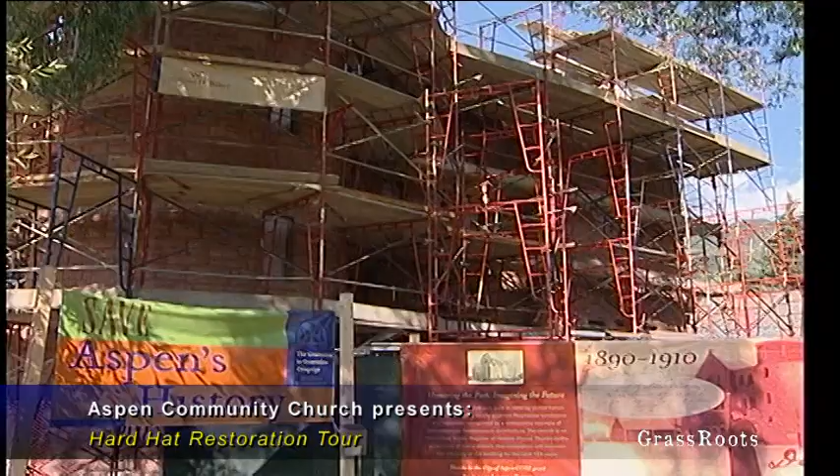Let me go into some of the challenges of its original construction. All the material, all of the masonry, was pulled out of the Frying Pan up someplace around Ruedi. It's all called Peachblow. In the 1880s, there was a railroad spur that went up the Frying Pan. So all the material was quarried; it was rough in shape.

All the material was hand stacked into horse-drawn wagons, and the wagons were pulled to the railway spur and loaded by hand onto cars. Then they were pulled down the Frying Pan and up the Roaring Fork. I think it was on Dean Street that the railway would stop. They would then hand load the material back onto a horse-drawn cart and pull it over to the church. All of the material was shaped by hand here.

We know this because all of the pointing material, the pattern called grapevine, was tinted with all of the powdered material generated from shaping all of the stone.

So we calculated the weight of the building. We assumed, and I verified, that the foundation goes down about 6 feet, and we know the wall thickness. So we did some calculations, some of the masons and I, and we figured that the building weighs 1,500 to 1,800 tons. That's the quantity of material that was moved out of the Frying Pan.

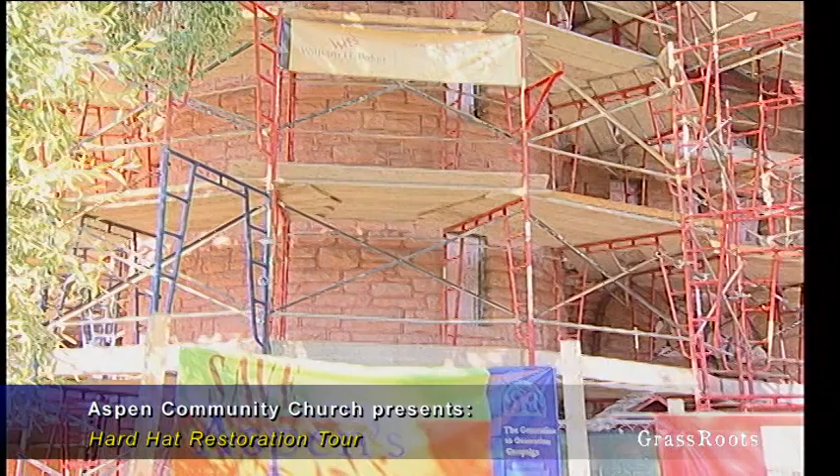You'll see the greatest care was given to the south face and to the west face of the building. So the masons, when they started constructing this, they would gather stones that were misshapen and create all these flat edges. All these stones were irregular, and you'll see that they all have this rectilinear shape. All of that was created here.

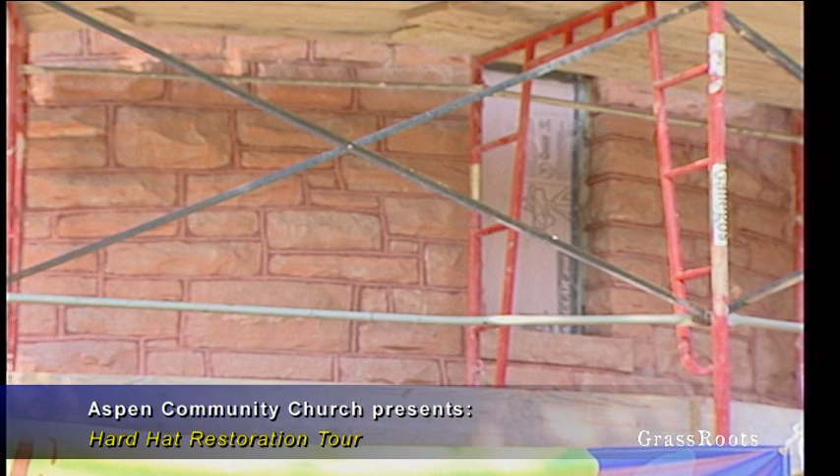The wall is 18, 20 inches thick in general terms. It consists of this very attractive outside facade, and an interior that, in general, their goal was to make flat, so they could plaster the interior.

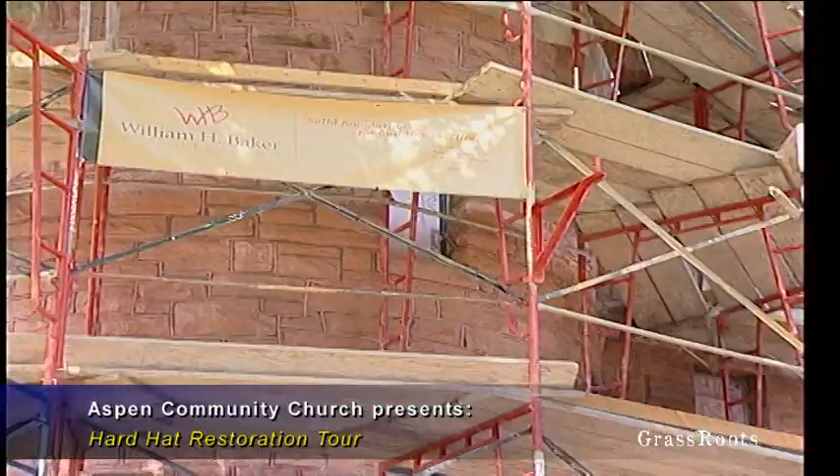The section between, the 6 or 7 inches between - so if I could describe an 18-inch wall, it would be a 6-inch exterior that's very attractive, appearing as what we see here, and then a rectilinear flat face on the inside, and all the rubble and trash went into the middle. That's how the building was generally constructed.

Tremendous care in terms of carving and detail work was offered on the south side and the west side. I'll take you around here shortly and we'll look at the other sides. Not nearly as much care was given on the other sides. They had the A-teams on these two sides and they really came out nice, and it's a little bit looser on the other sides.

The tooling that we see is called grapevine. I have the lead foreman from Gallegos, Steve Lavin, who was responsible for all of this. Steve and I did the Christ Episcopal Church four or five years ago together, and so all the work that I'm involved with, he's involved with in general terms.

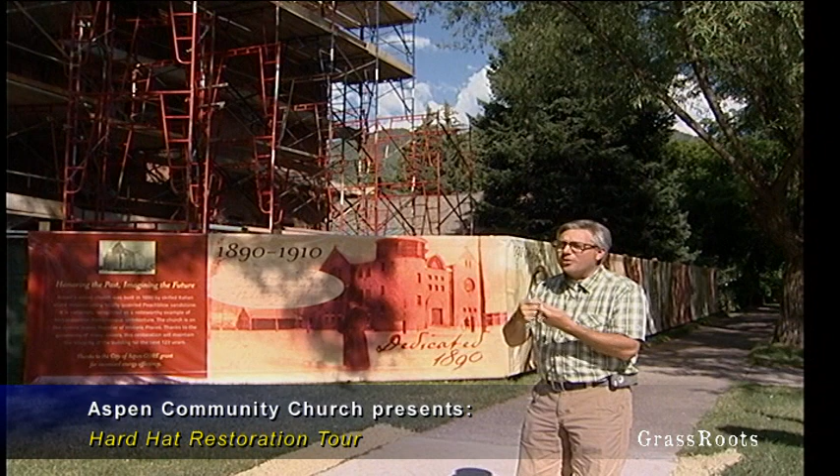Steve found original parts of the original pointing. We found sheltered pieces that were in good shape. Steve had tools made that were the same shape as the original pointing. We were able to find the interior, which is called the lens, the interior of the material. It was purplish and brown on the outside, all the pointing before we redid it. It had been exposed for 120 years to the elements and so on, and it was really unattractive. But if you snapped it, you could see the original color where it hadn't been exposed to the elements, and that was this salmony color.

Steve explained to me when we first started this project that all the material was shaped here in general. They salvaged all the powder, and when it came time to do the pointing, they mixed that and did all of this. So Steve had created tools that were the original profile and shape of the original tooling, and then we took the color and had it sampled in a lab, and had it reproduced in this historical context, meaning that the strength of it would work well with this sandstone.

If you use new materials between these stones, there's no give, and the mortar is stronger than the stone, and the stone could be subject to breaking. So the mix, everything is quite specific.

We found around the building numerous places where there had been settling and so on, and Steve and his crews installed stainless steel rods to help displace and disperse the weight. We're hoping that'll hold it all together.

The building has never had gutters in general terms, so for 120-some years the water has just poured off of the building. All of you probably have seen the building in November, January, February, and you can almost ice climb on the east side—the icicles get so substantial.

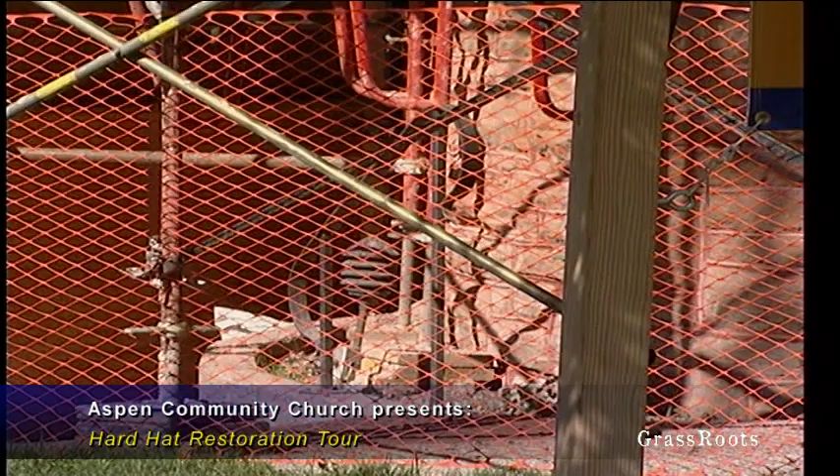Part of what Steve and his crew have done is remove all of the bedding material that was loose, compromised from all the years of water infiltration. We would get back several inches and it would be like brand new, so all of that was pulled out. New bedding material was pushed in between the rocks, and the last inch and a half or so was reserved for this tinted pointing material.

So it's really quite remarkable what was accomplished in 13 months to get this building built—to dig it, quarry all the material, and put a roof on it in 13 months. It's amazing.

Do you have any idea how many people were working on the building? I know that it's got to be 100, 200, some number in there. It would take a tremendous team at the quarry, on site, just for material handling—it would be significant. The building was built for $20,000, which isn't too much—we spend that every couple of days around here.

So what else can I share with you? How do they cut the stone—it's really soft. Do they have chisels, or do they have bandsaws? This is Steve Lavin from Gallegos.

Chiseling, you can really, it's soft enough that you can chisel it and it holds together real good. It's not brittle, it doesn't fracture. Even before I was on this project, I was always impressed with the Peachblow material. You don't see much of it, and every time you did a little remodel job with it, it's really fun to work with because it's some of the easiest stone to work with to get the desired product.

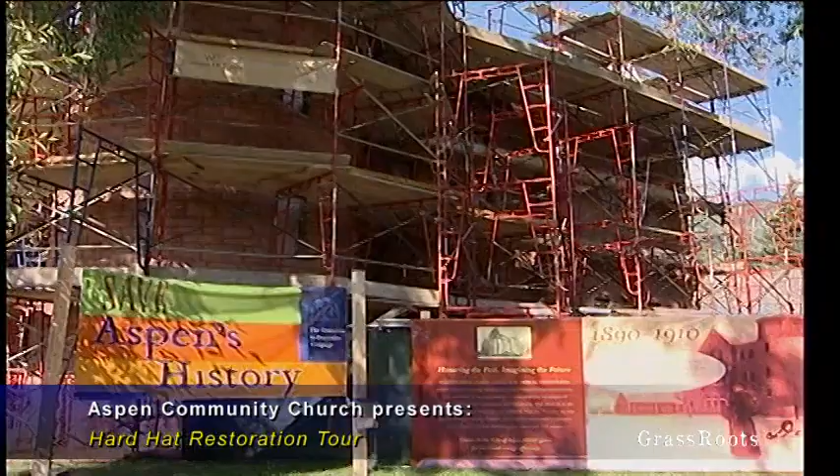This building was one of the first buildings in Aspen to have electricity. When we open up the walls and ceilings, you'll find knob and tube and open uninsulated wires that snake around. It's a little scary, but the original light fixture in the sanctuary, I believe, is original, and it was one of the first light fixtures in Aspen. There was a hydroelectric plant up the pass, I believe.

So you'll see, let's walk down and look at this face. I'd like to point out a few details, and then we'll walk the whole building. If anyone has a question, please speak up. Oh, we're going a different direction. Of the front door, you'll see all of that stone is hand carved — it's a hand carved inlay, which we're going to restore before all of this is done.

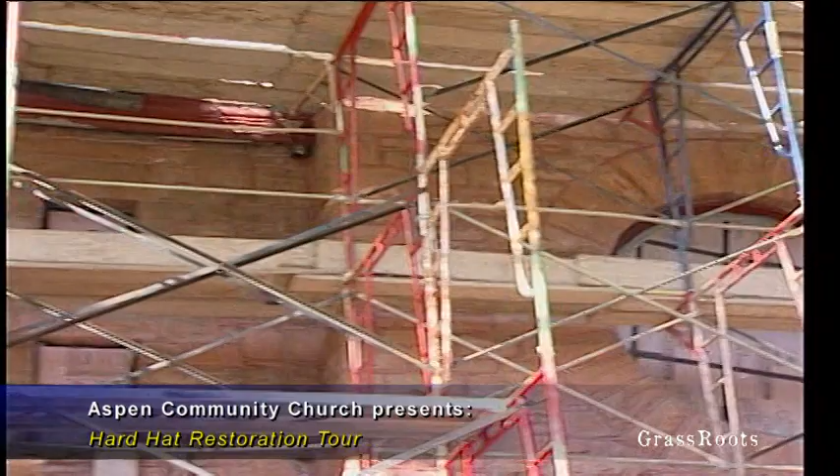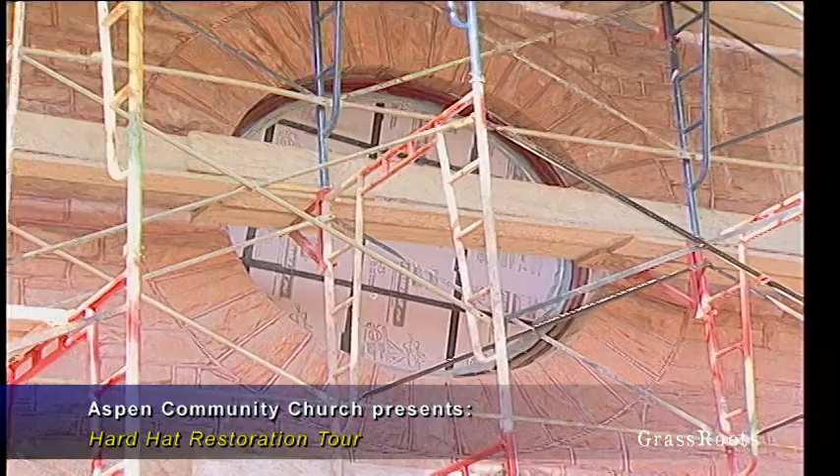What kind of hoisting system did they use to build the walls up? I suspect the exterior and interior were completely scaffolded using lumber. I think there was mining influence in terms of the labor force, so they likely scaffolded the way we do now, using wood planks and a wood structure. They also used large poles where they'd cantilever a pole and have a pulley on the end. Some of the coping stones up on the gables — there are 3 gables — weigh 400 to 500 pounds. Nowadays, we just call a crane; in fact next week we're going to set all the coping stones with one. But the original masons had to figure out how to get it all up there — I'm sure they used things like pipes and pulleys to move the stones.

The church actually has a pretty interesting history in that you think back to what was going on in Aspen in the 1890s — that was the silver boom. That's what was going on here. So there were a lot of actual silver miners, guys who were working in the silver mines, helping on this building, as well as some ranching families.

Ranching was also big back then. And then you had Italian stonemasons who had come here to work in the mines or what have you. The Aspen Community Church, in part, was built to be a central place where people could meet and have community, because during the silver boom, there were more brothels and bars than you can believe, because that was kind of the culture that was going on here. So this building was built in part to be a place where people could have some good, clean fun, so to speak.

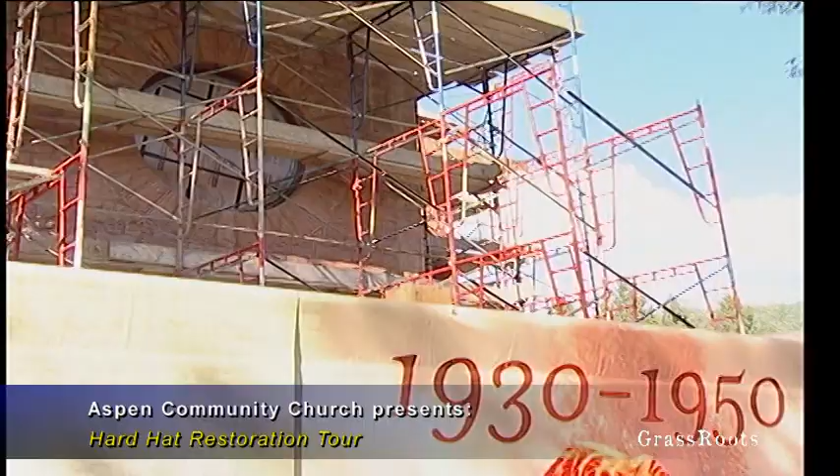Also interesting, some famous folks have visited the church over the years. Albert Schweitzer came here during the Goethe bicentennial, and it's rumored that he played the organ here because the Paepckes lived right around the corner, and he loved to play the organ. Reinhold Niebuhr, who is the author of the famous Serenity Prayer, also came here, and I believe that was in the early 70s, and did a sermon, which is great.

John Denver recorded one of his first Christmas albums with the Dickens Carolers, and that was in the early 80s. So there's been some really interesting characters that have graced the church building to do community programs and or religious ones. It's housed a lot of great characters over the 124 years of its standing.

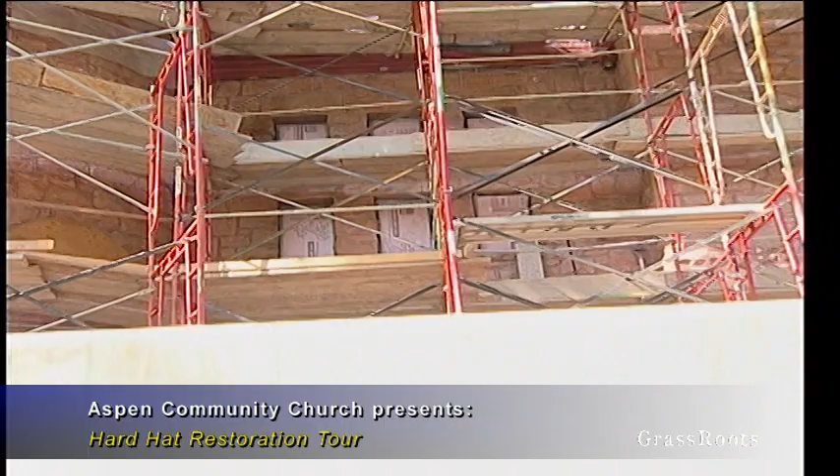I'd like to point out these three lower windows. To the left of the furthest left window, you'll find a little gray bit of pointing. So there's a few places around the building that we were able to maintain and leave the original pointing. Some of you will remember a church where all of the pointing was a gray or even a purplish, brownish color. And there's a fair amount on the west side of the bell tower as well.

As I mentioned, significant care and attention was given to the south side and to the east side. Let us go ahead and walk around the building and let me point out some of the details and some of the differences. Specifically, they only had limited resources, time and material, and they made some sacrifices along the way. It's kind of interesting to see where they chose to push.

A grayish charcoal up on the bell tower, and we also found this color green as an original paint color, or sometime along the way it was painted that color. The roof, the vestry, the council is electing to stain the shingles this black color.

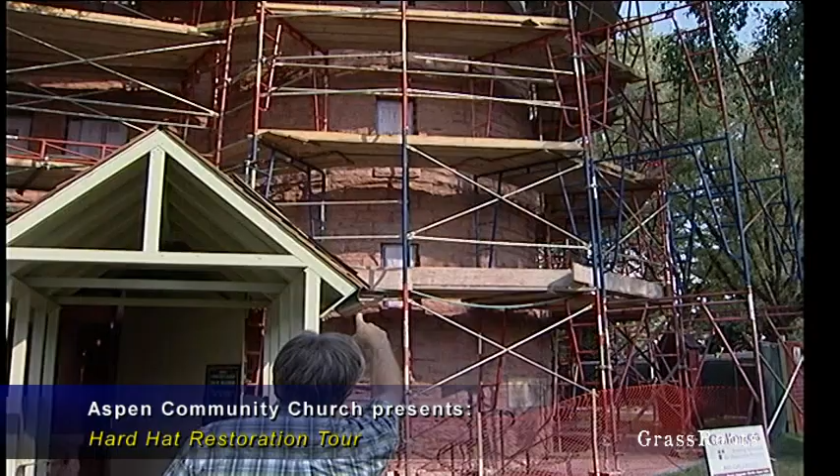So moving around, there were numerous cracks that radiated out of some of these windows in the turret, and those have been, we hope, corrected and stabilized.

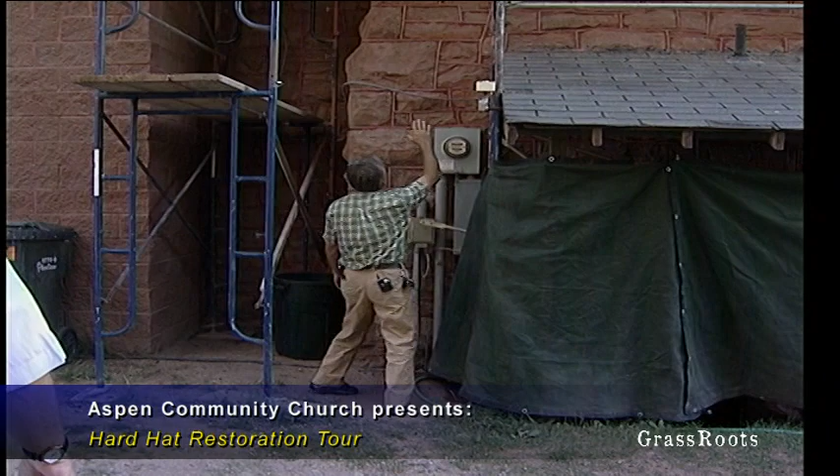We call this battered, where the bottom of the building flares out. So the whole building is battered. Up over my head, the building is vertical and it comes down and it has this 8 or 10 inches of flare. So it's very attractive. It also helps the structure increase its footprint and have additional push, or this buttress that we'll see on both the east and west sides.

However, the building has never had any gutters or eaves, so all the water would fall off the roof vertically and land at this flared, battered section. After a rain, you can see where the building gets wet, and those are the same places where it's in the worst shape. So part of the scope of work for this project is gutters and downspouts on the whole building, which will go as far as anything to mitigate future water infiltration damage.

So you're heating the gutters and downspouts? We will.

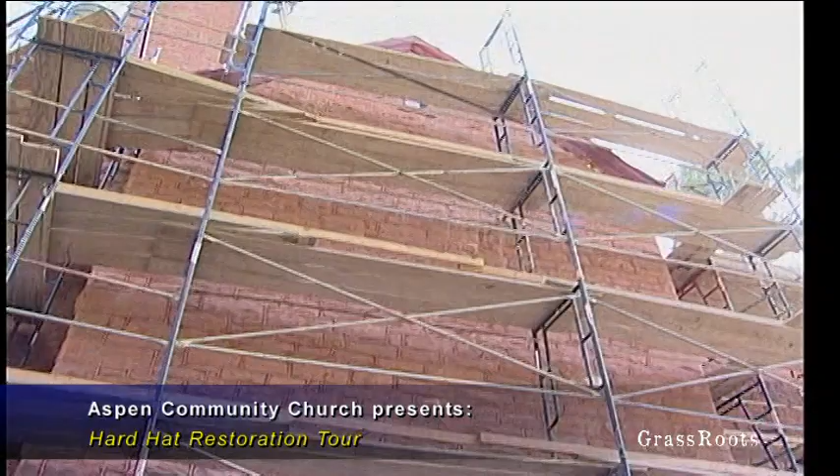All of the corners have— Steve, what's the proper term for this? A point stock. So all of the corners have this detailing, it's really attractive, and you'll see it on in general every corner. Steve, was that done with a chisel or something? An adze axe. What about the texturing on all the sills? Same, that's where they use point stock.

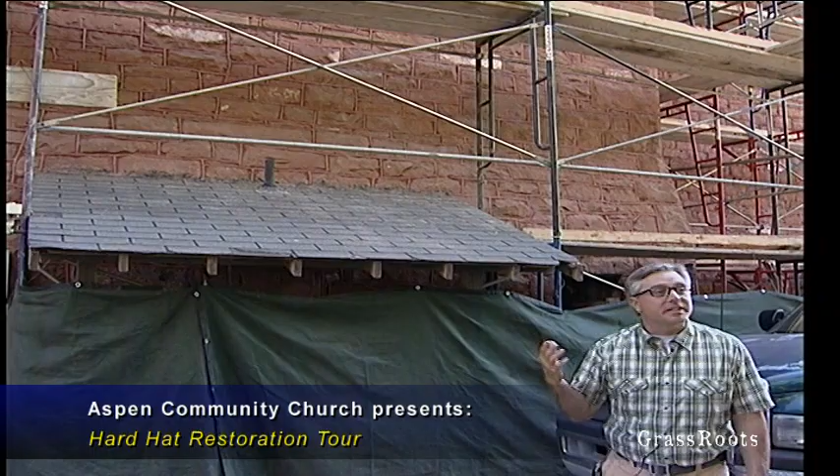You'll notice the format of all the stone on this whole back alley side is significantly smaller than on the front. They selected the nicest material for the south and west faces, and the remaining material went to these two exterior sides, and the even less attractive material went to the interior—all the junk went on the inside.

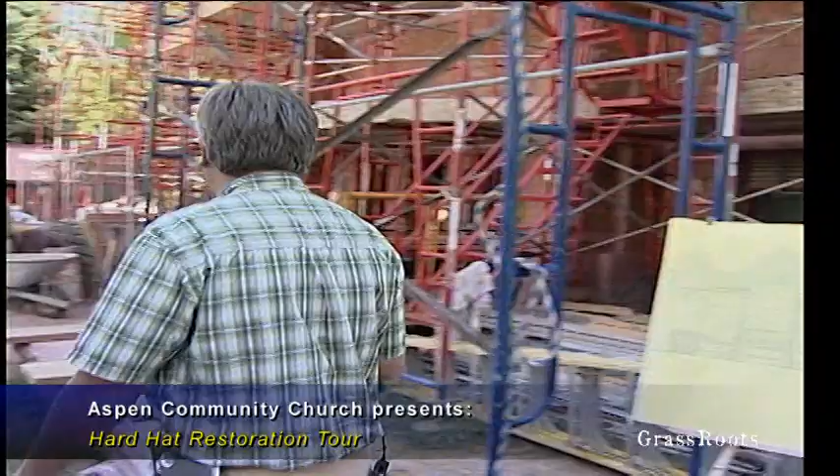So let's move around. I'd like to show you some coping stones we pulled off the building, which came off the gables. We've removed them—Steve and his crew broke them free, though they were already loose—and we picked them up with a crane and brought some down here. Some of these are 400 or 500 pound stones.

When we started, in general all the stones were loose. They had been sitting up on these gables at a steep angle, completely exposed to the elements, so all the rain and snow sat on them, infiltrated in between, and would freeze and thaw, and so they slid down the roof. The only reason they never fell off were the masons built little keystones and integrated these little scroll pieces.

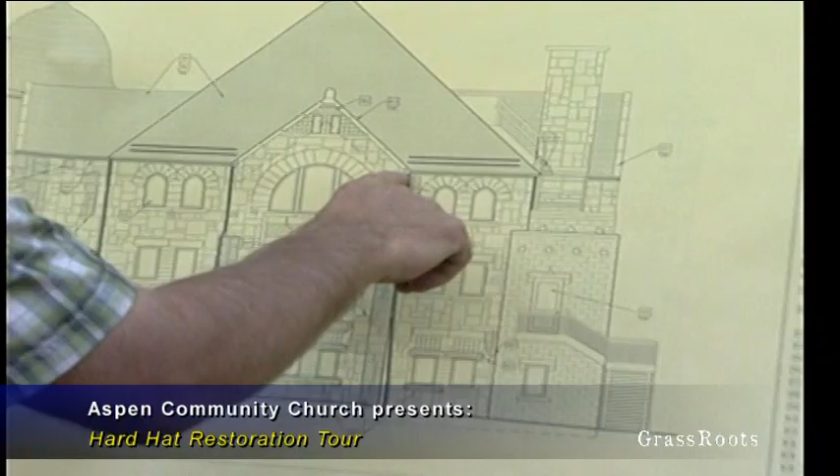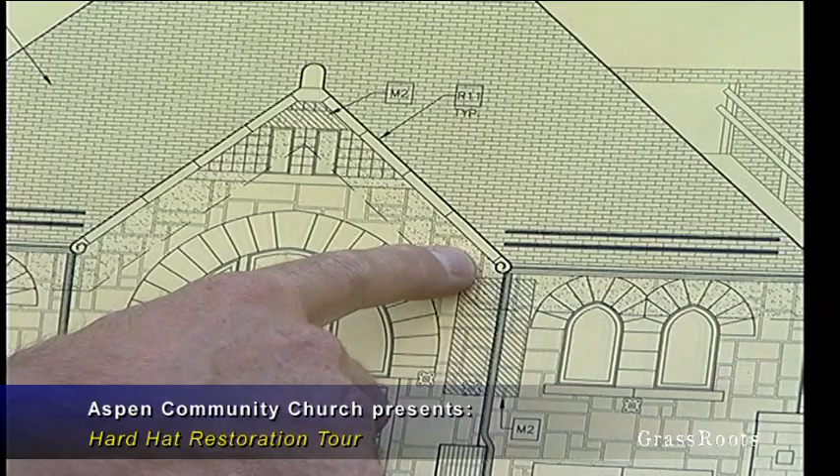Unfortunately we can't see it, but I wanted to show it to you on the plans. There's this decorative scroll piece, which was super ingenious because it ties back into the wall. You can imagine all of these were loose—when we found it, there were gaps of 2 and 3 inches at the very top, and these down here were all tight. The only reason they didn't slide off the roof was this scroll keeper piece was weighted by the masonry of the gable and wasn't allowed to move, locked into the corner. These are some of the construction techniques I find so fascinating—that in 1890 they were tuned into little details like that.

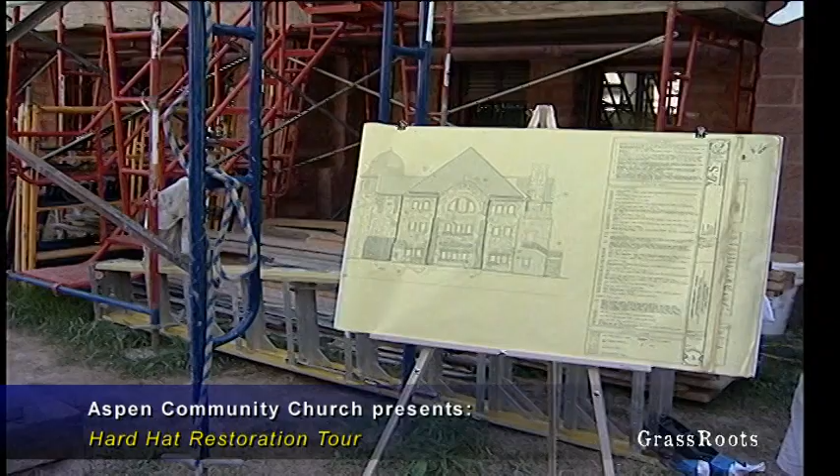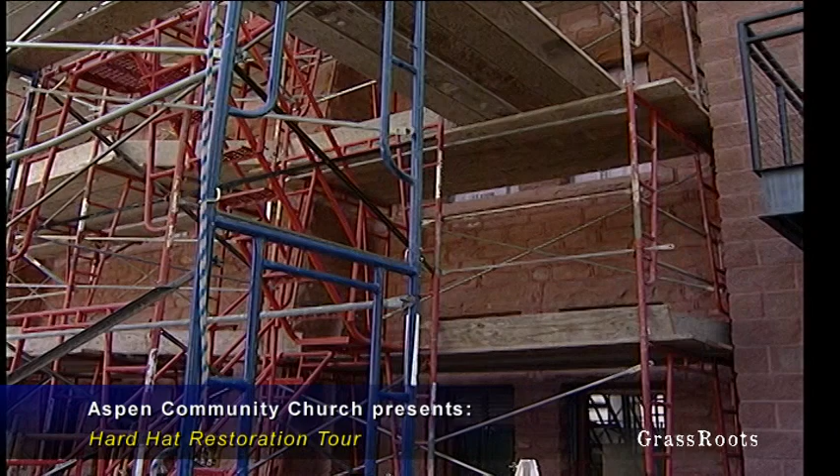On Wednesday we'll start picking these up. So to prevent what happened, we have lead coated through-flashing, and we also have a stainless steel strap with pins above and below—I can show it to you once you're up on the scaffolding with me. Steve has embedded these steel straps that I had built, let in and secured to the stone below, with stainless steel pins that turn up. We've drilled holes in these pieces of coping, so the pins will be received by those holes, and we'll have lead coated caps above, which will prevent gravity from sliding the stones down in the future.

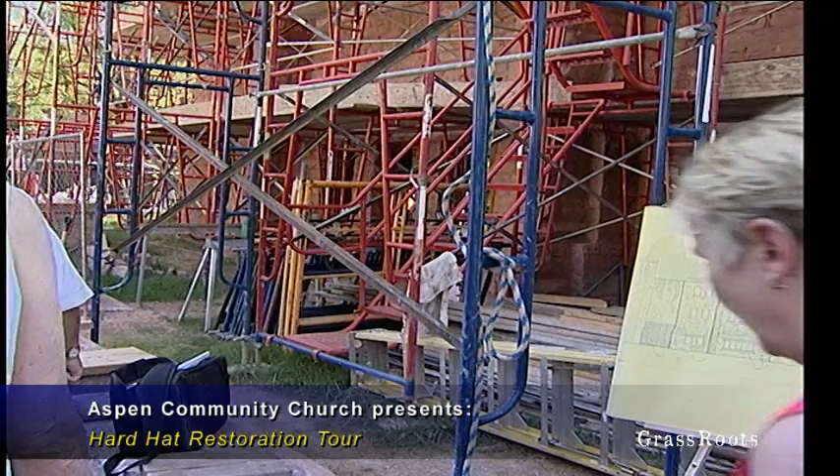If we take a look around over here, you'll see, much like the alley side, there are steel plates, washers, star plates, and rods that tie through, and the balconies are almost supported in this post-tension kind of methodology where they are pulled back. When we go into the sanctuary shortly, you'll see that the balcony itself is all cantilevered out, tied into these buttresses, which is part of the original Romanesque architecture the building was designed with.

We started all of our sampling for the pointing, and again, we found some of the original material. We broke it open and found the salmon color. We sent it off to a lab, got a couple different variations, and started applying them. We put it on the first time and it was almost as red as the scaffolding, and we all panicked.

Over four weeks, the original samples mellowed out so much that we could finally make a presentation and share them with the rest of the team, specifically the owner's rep and members of the congregation.

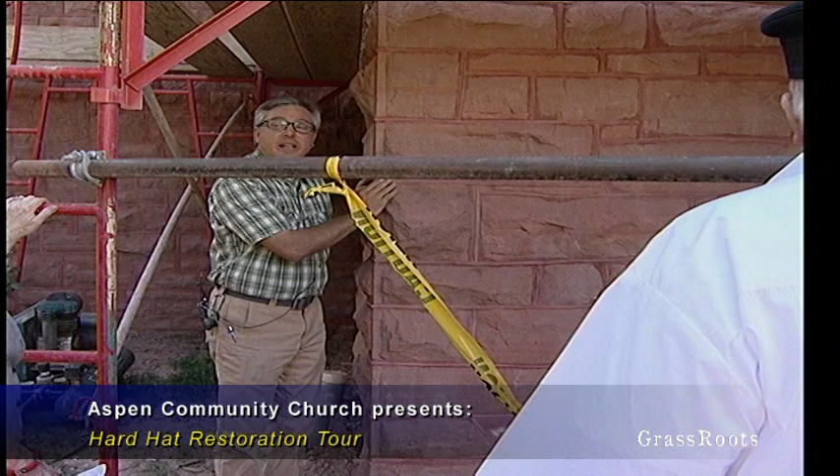If I could, I'd like to show all of you this, but you'll see that a lot of the pointing isn't even matured enough, and we have a few areas over here that have reached the final color. In time, the whole building, all the pointing, will match this. We like this so much because it kind of blends in with the stone.

It lets the stone be stone, and the pointing kind of goes away because it's the same color. So you'll see various different generations of pointing that we did along the way, trying to establish this. We had some confidence that the whole building would turn that direction, turn that color.

Does anyone have any questions? I do - the foundation, what kind of shape is the foundation in? The foundation is essentially this same type of wall, larger format material, 5 to 6 feet down. There's a fair amount of gravel.

It was all hand dug. Over the years, I think maybe 20 years ago, a pond liner, for lack of a better term, was installed around the perimeter of the building. There's no drainage system. The waterproofing is limited to a liner that runs around the perimeter of the building.

We are reasonably comfortable and haven't made foundation waterproofing part of this scope, on account that we're capturing all of the roof drainage via gutters and downspouts, and we're going to pipe it underground to a storage basin where the water can soak into the ground. We'll filter it through a little filter chamber, and then it'll dissipate into the ground.

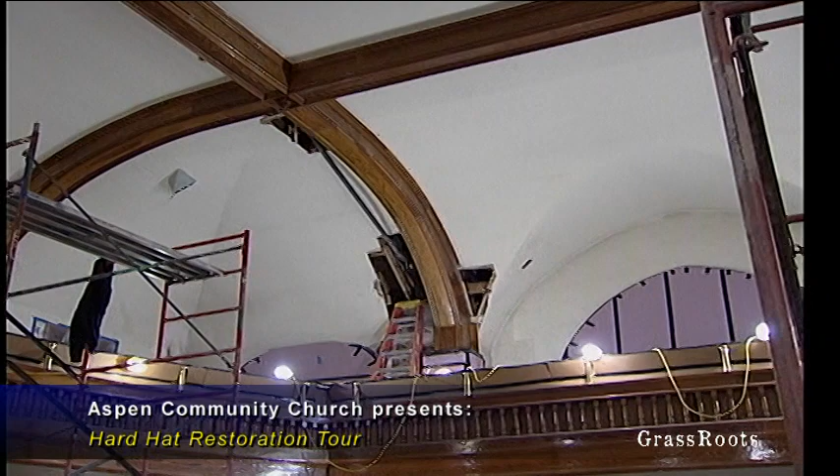These concrete slugs - we channeled on both sides of them and put these steel frames in. All of the roof weight bears right next to where we were working. We had to create and consolidate a high-strength concrete slug capable of carrying all of the new weight of the truss right next to where all the weight is already sitting.

So to do that, we channeled using this really expensive saw, and we let in these giant 6-inch by 6-inch steel frames and tensioned them to hold the stone, then worked inside the steel frame to hand dismantle all the different pieces of stone. Then we cleaned it. These pieces of concrete are 18 inches wide, let's say 24 or 30 inches tall, and extend 12 inches back. I described the cross section of the wall as 3 sections of 6-inch. So we went 2 sections back in general, which allowed us to maintain the original exterior facade.

Once we had created this space, we built templates that held anchor bolts and hung the anchor bolts in. And we mixed 5,000, 6,000 PSI grout and poured it all in place.

Meanwhile, to elevate everything, because each truss leg for the new trusses is a different length, everything extends a little bit differently. Using lasers and full survey equipment, we established the distance down to the 1/16 of an inch in distance and in elevation as well, and that allowed us to fly the trusses in.

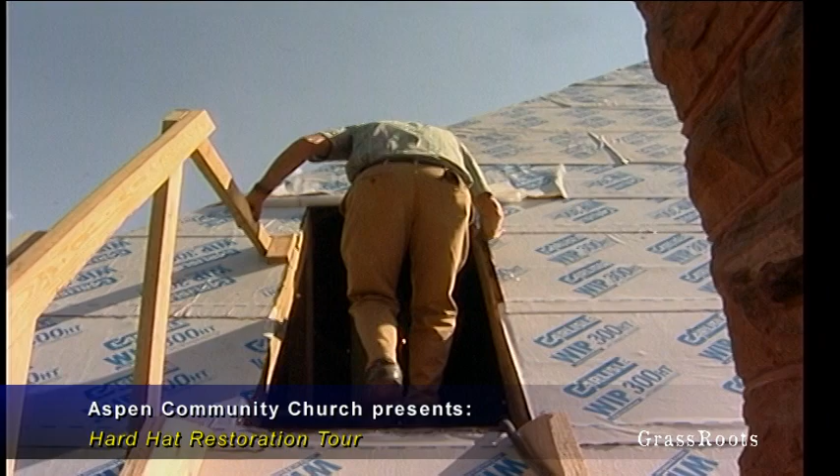So this is all new steel. Is there any steel in the original building? Yes, these rods right here.

The weight is off the old trusses. You'll see blocks on them right there, Howie, where we're picking up the top chord of the old truss. The roof makes a hip at each corner, and at each of the 4 hips we have significant pieces of tube steel that project out horizontally. They intersect the bottom side of the original hip, then the tube steel runs down and sits on top of the masonry, and is bolted to the masonry.

The attic was pretty dry, extremely dry—it was scary to weld in here. There wasn't any rot. When we first started, there were bats flying around and living in here, and this whole place was full of bat guano and general feces. It was ugly. We cleaned all of the old insulation out.

Part of the reason for all of this is that the building has always historically suffered from ice damming. All the valleys would ice up at the eaves, and water would back up behind it and pour into the building. Particularly on this northwest side, there's always staining that happens in the winter months.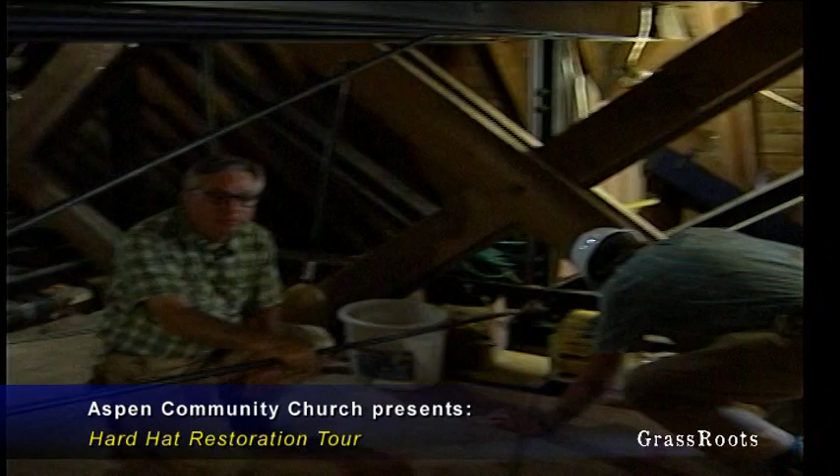The roof up here is going to try to be the same temperature as the outside, so we're not going to constantly melt the snow. The water isn't going to run down to the eave because of the interior, and we're also going to save money on our heating bills. The insulation is paid for by CORE, the Community Office of Resource Efficiency, through a grant that was written. So that's taken care of by CORE, which is really great.

Yeah, that's the lath—that's the top side of the plaster. Was there asbestos here? Is this insulation? No, we're pre-asbestos here. I had it tested before we started. It was one of the requirements for the building permit.

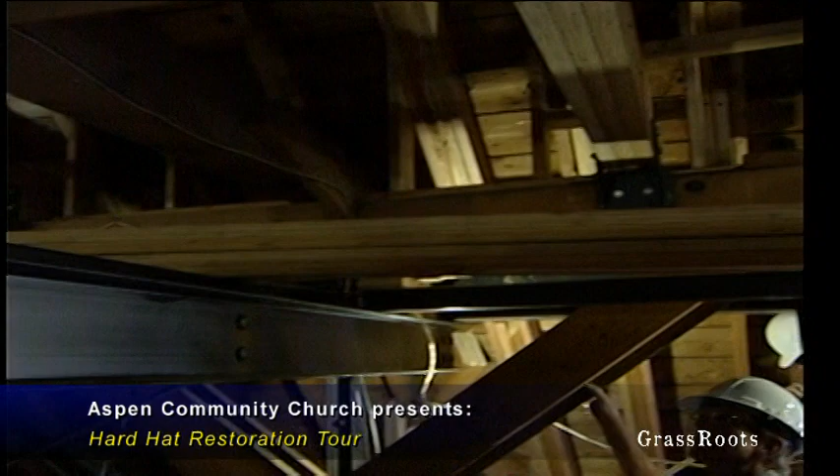No asbestos was found. Part of our preliminary stabilization was all this upper framing—we did a lot of it several years ago. Then all the steel and lower framing we did here recently. In general terms, every rafter has been re-supported. As you look around, there are companion rafters on almost every single rafter. My point being, we've essentially built a roof inside of a roof and installed all the support for it underneath the roof at the same time, which is why it took longer than normal, not having a roof. Made it much more challenging and exciting.

It's kind of amazing—the old wood looks in great shape. This is the original truss right here. You'd think there'd be deterioration after all these years, but no, it's all in great shape.

When you tighten the building up, you were putting pressure in to pull it in and restabilize the shell. How much did the walls and ceiling move? Did you laser measure it to get a sense of the distance? We pulled the legs in—a net of like an inch and a half. We slid the base of the trusses in, and we saw that bit of movement on each side, where they had extended off from where they were originally designed to plane into.

So these beams were put in 3 years ago? Yeah, this stuff was put in 3 years ago—this and some of the framing that holds the upper section. All the discoloration on some of the upper rafters, that's all from the bats.

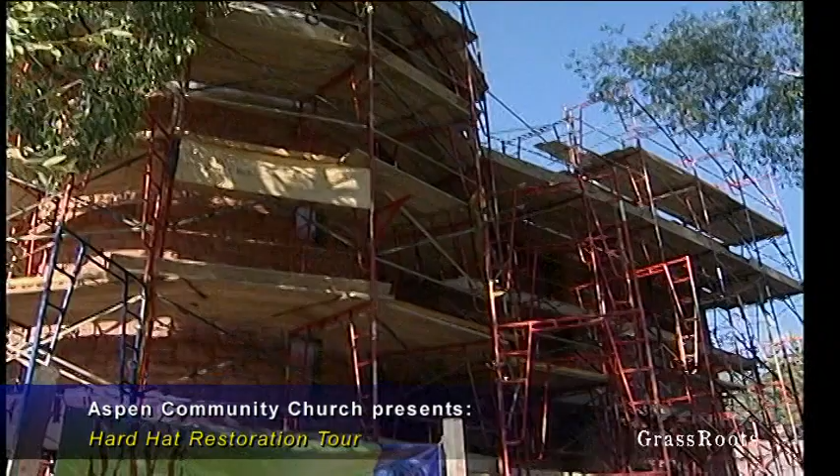Well, that's it for our hard hat tour of the historic Aspen Community Church renovation taking place here in Aspen, Colorado in August 2013. It's been a great tour and we've learned a lot. The community church is not only a church of many faiths, but it houses many programs, lectures, community events and performances - a wonderful community center for all of us here in the Roaring Fork Valley. Thank you all for coming, and we appreciate the community's support, and we hope to see you.